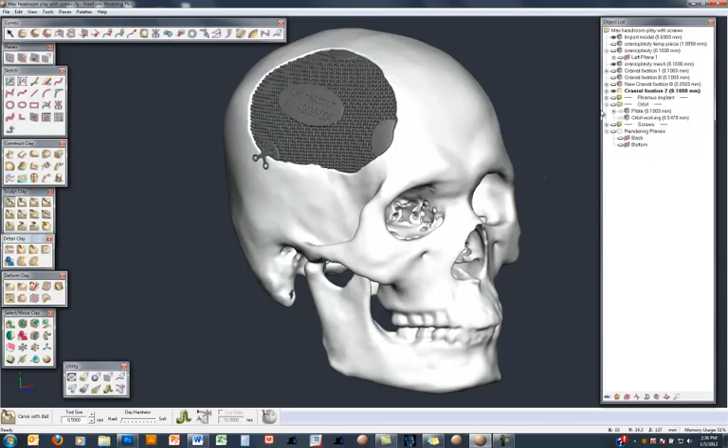I wanted to point out two changes we've made to existing functionality. The first change we've made is to piece reposition. So if I take this model we have on the screen and I'll hide the skull and then just zoom in up around the plate and the bracket.

Now most people are completely used to, when we're zooming and panning in freeform, especially with very heavy models, we'll drop down into this sparse mode, and then as soon as we let go of the G key or the H key, the model will redraw itself in full detail. Now with piece reposition, the way it used to work is as soon as we were moving a piece around, it would keep itself in fully shaded mode all the time, and for very heavy pieces often you would get a very jagged motion, you wouldn't have a very smooth motion.

Well, we've done a change now that it will automatically drop itself down into sparse mode when doing these gross movements in piece reposition, and if you hold the shift key to go to precise movement, it'll maintain a fully shaded mode for complete accuracy.

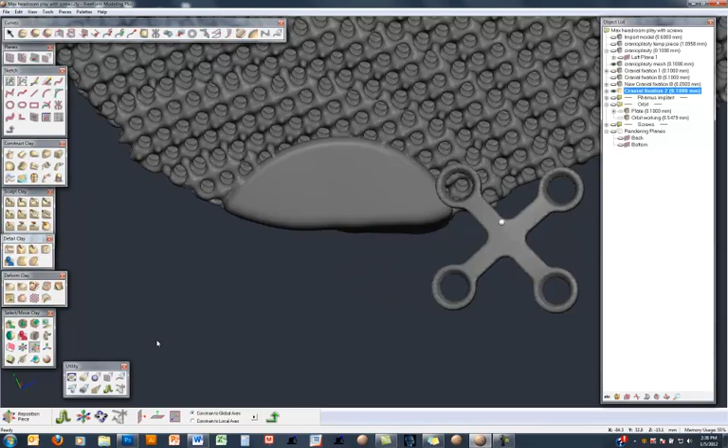Now it may take a couple of seconds to dump the whole model into the graphics card memory, so if I try moving this one again, you see that the first few seconds it can be fairly jagged, and then once the graphics card memory has fully absorbed the model, all of a sudden everything speeds up and it becomes a lot more interactive. So that's just one thing to be aware of. So that's one of the changes.

Another change we've made is in how the model rotates when using the arrow keys on the keyboard. What we have on the screen right now are two of these diamond shaped brackets with 4 screws in the top bracket, and then down here we're showing the global coordinate system. For this top bracket, which is currently active, if I show where the local coordinate system is, you can see that it's right in the middle of that piece.

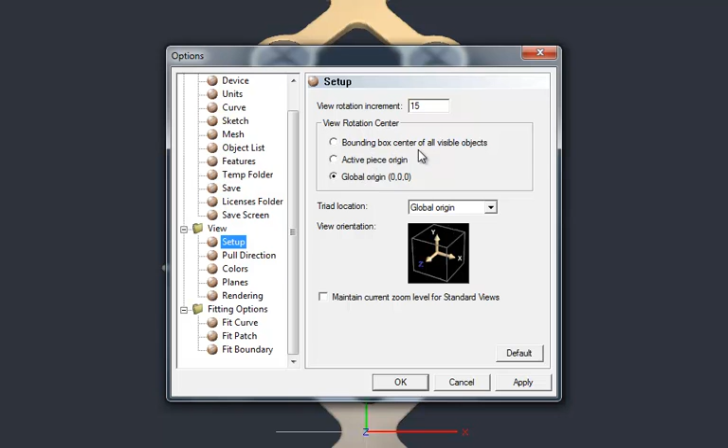Now, if I bring up the options, and under setup we have some new options here for view rotation center: global origin, active piece origin, or the bounding box center of all visible objects. Right now we're set to global origin. So when I use the arrow keys, and right now my arrow keys are set to 15 degrees, as I rotate, you can see it's rotating around the center of the global origin.

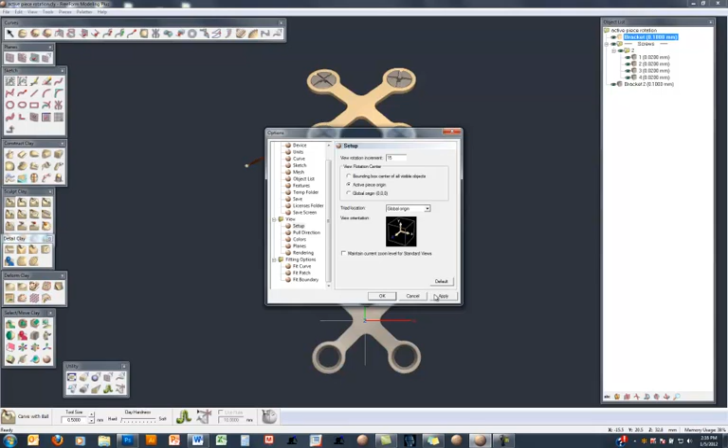If I move that to the active piece origin, and this piece at the top, the piece origin is pretty much right in the middle. So now you can see it's rotating around the active piece origin. And if I zoom in, it still rotates nicely around the active piece origin.

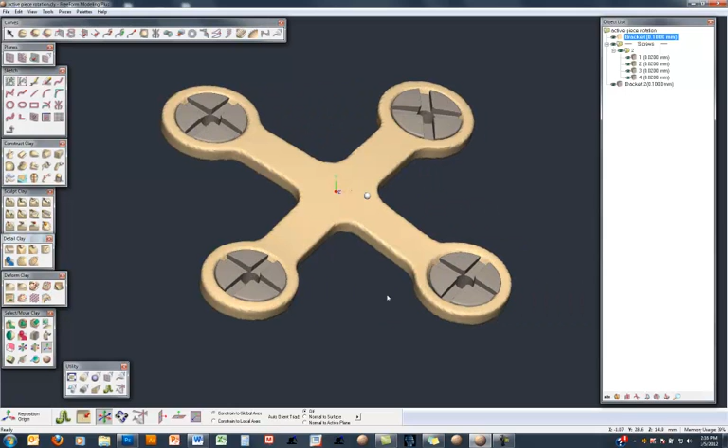If I went back to rotating around the global origin, and now use the arrow keys, you can see how we have a different behavior. And if I activated one of these screws and really zoomed in, right now we're still set around the global origin, and hit the rotate, you can see how it rotates off the screen. Whereas if I put it back to active piece center and now do my rotation, everything stays nicely on the screen.

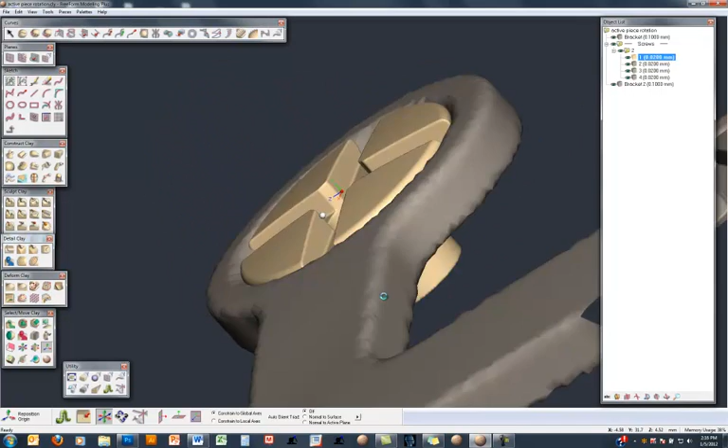And then we also have the option to go to the bounding box center of all visible objects. So if we activate that and see how it behaves, again it rotates off the screen. So we have those 3 new options. Choose which one is best suited to the situation you're at, and you should be much happier with how your model is rotating on the screen, especially when zoomed in like this.